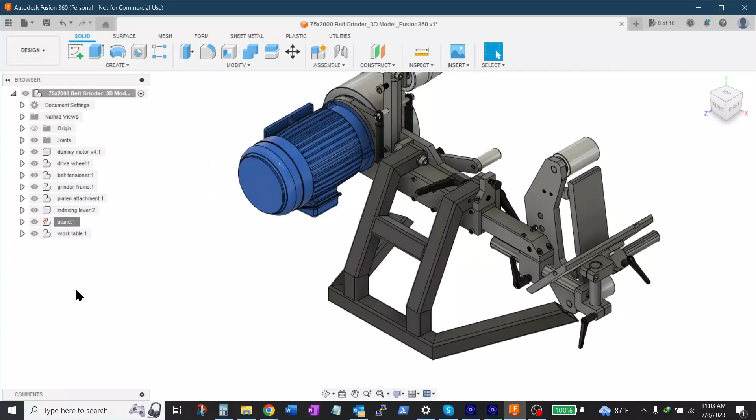This is part 6 of this never-ending saga of building a professional belt grinder by Phil Vandelay's plans. And this week I'm building the stand, shown here in Phil's plans. But I'm going to change it up again. In Phil's plans, it hinges by a pivot right here where the arrow is showing.

And so in the horizontal position, it locks, but it hangs way out there, quite a lot of weight. There's the locking lever and pin. But in the vertical position, there is no lock. It just hangs there by its own weight. You have the tightener clamp, but there's no real way to get a locking lever in there. Because if you put a plate there to lock it there, then in the horizontal position, that's in the way.

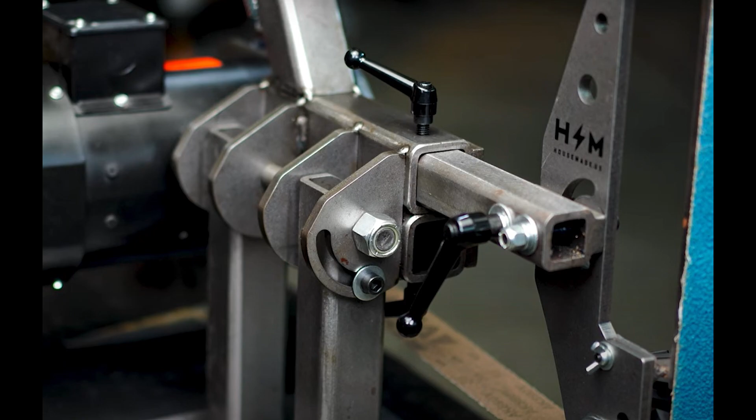So looking around the internet, I found a bunch of other plans, and they tend to use this vertical straight-up post mounted on the back. And I think that's actually better. It's the way I'm going to go. So I started off making those brackets at the back.

So when I was buying the steel, 3/4 and 1/2 inch steel, and the tubing for this project at a local steel supplier, as I was leaving I found this little scrap bin he had, lots of bits in there, and I grabbed a few little offcuts, and then I saw these things and I said, hey, can I have those too? And he said, yeah, sure, no problem, very nice.

Thinking these might be perfect metal to make the brackets out of that are going to be for the stand. I put a fly cutter on this to see how it would go, and it was very tough. I mean, I had to use coolant. Got a nice finish on it, but it's very tough material, so I'm guessing this is probably 4140, possibly even hardened to some degree. But I was able to fly cut it eventually.

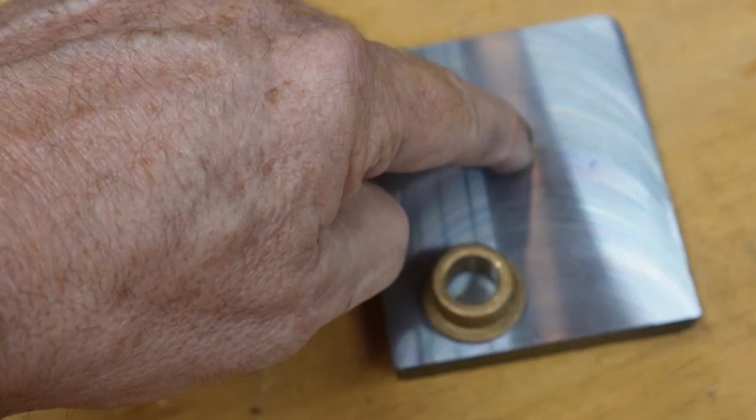So now the holes are a little too big for my 1/2 inch bolts, unfortunately, but I do have some 1/2 inch bushings from another project with a 3/4 OD. So I'm going to see if I can put a 3/4 OD hole there and then base going forward on how difficult or easy that is.

So this is just showing how I use a wiggler to scratch around the outside of the hole to get a nice consistent sound to find the center. I do own one of those coaxial indicators, but I find they just take too long to set up. It's not worth it for a small job like this.

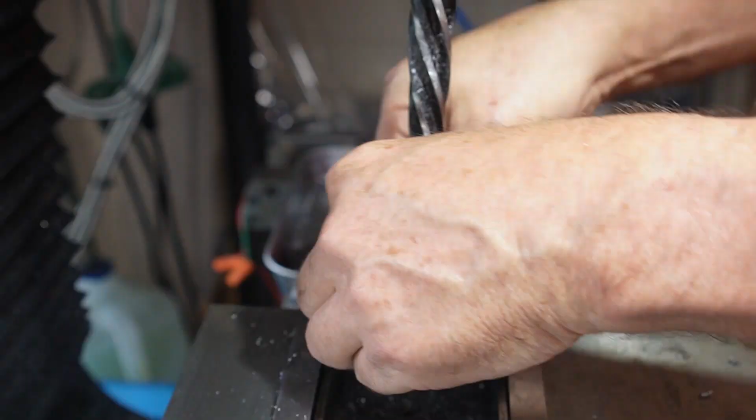So drilling out to 5/8 and reaming out to 3/4, and then I repeat it on the second part. Center finding, drilling, and reaming, and then testing the brass bushing. Fits fine. Okay, so I was able to enlarge those holes to 3/4 without too much difficulty, so my bushings fit in. So I guess I'm going to continue with the plan to use these two scraps. So I'm going to face mill both sides of both of them.

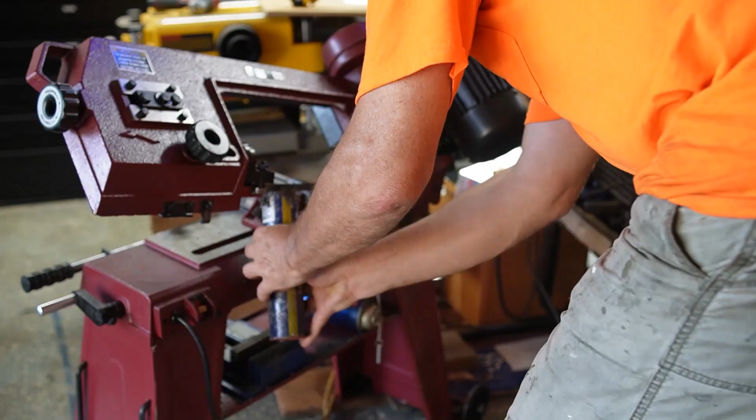So the next several operations, with calming machine sounds, are getting those pivot brackets attached to the rear of the attachment arm sleeve. So I cut them off to just a tad over 1 inch to allow for the stand legs to come, and then milled down their edges.

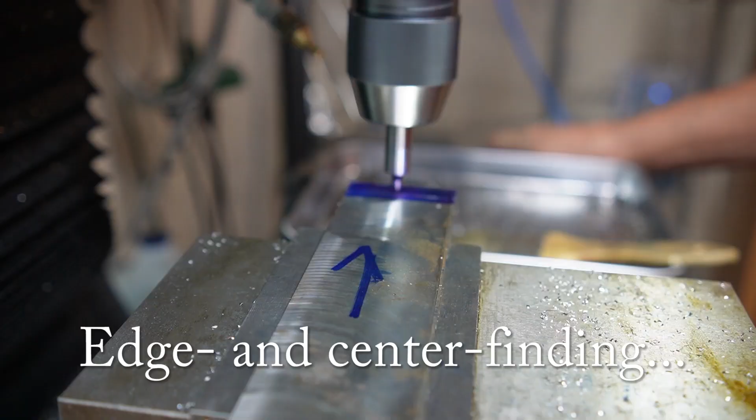So here's that rear attachment sleeve, and I'm finding its center so I can put in some clearance holes for some 5mm screws to come. These are what's going to attach those brackets onto the back of this. And I'm recording these positions in the DRO because I'm going to need them later. Now the cap head screws that are going to be used here have to get recessed into the back here flush to allow for the attachment arm to slide freely inside.

So here's one of the brackets, finding its centers and edges so I can pop those holes into the same positions that are on the back of the attachment sleeve, of course, using the DRO. So I drill them out and then tap them to 5mm for my cap head screws. You're going to attach this part on there. And of course I repeat for the second one, and here they are attached, and everything's good.

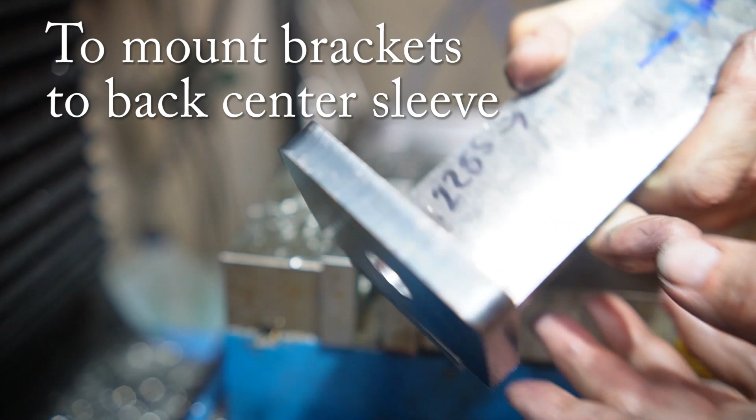Then I temporarily assembled this to test the fit, and I found that the edges of those brackets were just a little too tall. I want them flush, so I put them back into the mill here and just did a real skim to flush them up with the tops of that sleeve, because I'm going to attach some more brackets on here, some strengthening brackets to come.

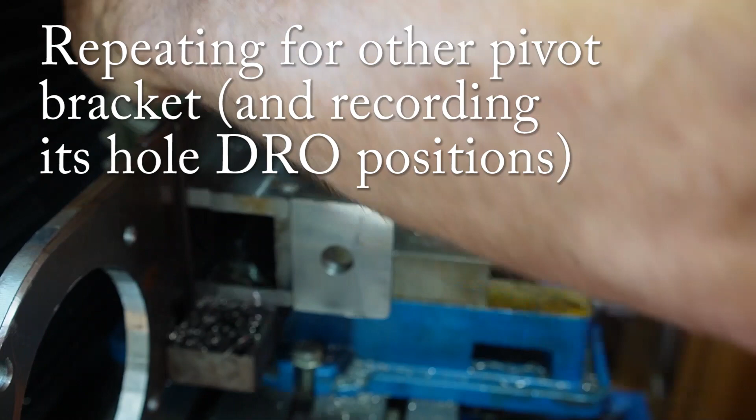So here I am finding the center again, drilling some holes while recording the positions again on a piece of paper for later. Also found the position of those 6mm holes in the sleeve, because they're going to be part of the bracket as well. It's going to be really sturdy with lots of screws in here. So tapping for 5mm in the top of the brackets, finding that 6mm position as well and recording it.

This is just threading the other end bracket. So now I'm going to spend a while doing a purely cosmetic thing here to the main plate. Kind of got a bit of excess steel here that doesn't need to be here. I think it's going to look nice, a little notch cut in here.

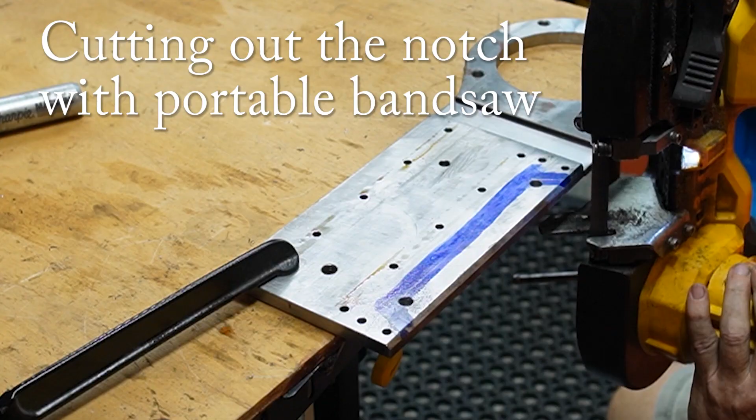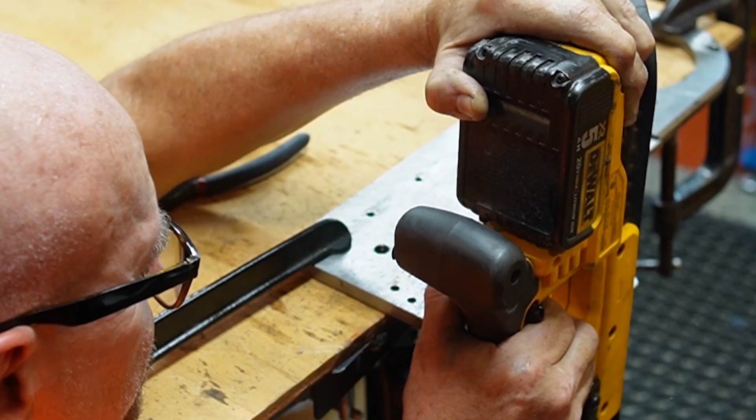So I drilled those holes to give myself some room to get my portable bandsaw in there, and cut out the bulk of the material that way. And then moved it over to the mill so I could clean up the edges, and also chamfer the edges, and tilt it up to get the angles and chamfer them as well. Just getting everything all looking nice and chamfered and consistent. But purely cosmetic, as I said.

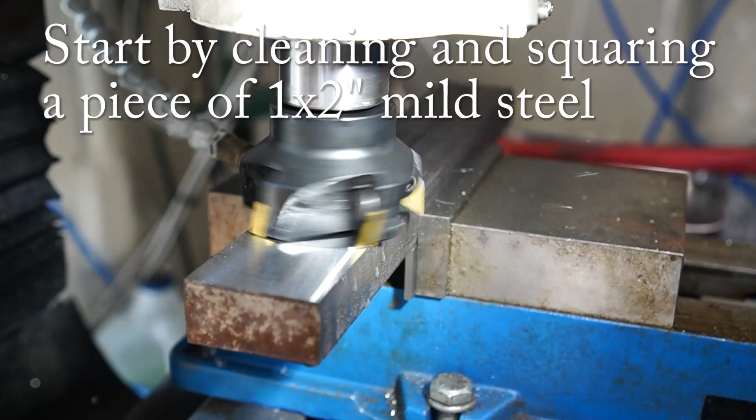So now I'm going to make some beefy support arms for those pivot brackets. You'll see how they're used in a moment. Start by cleaning up the surfaces of this big 1x2 mild steel. So let me describe what's going on with this piece that I just cleaned up. I'm going to use it to brace my pivot point here, my brackets on both sides.

Obviously this is a big, beefy, far more beefy than it needs to be, piece of metal. I do need it a little extra thick because these holes stupidly don't line up. In perfect hindsight, I would have made all this set of holes line up, and they don't. So I need some extra thickness just so I can get holes through it without going out the sides.

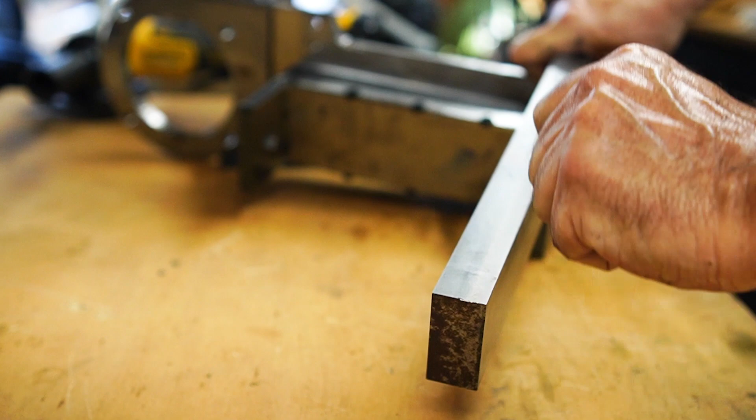And then I want this piece long here to make a handle and a place where I can clamp my part in a horizontal and vertical position. But it's not going to be this thick. I'm going to basically cut this down the center to give myself an inch block on each side, but in a little tricky design here.

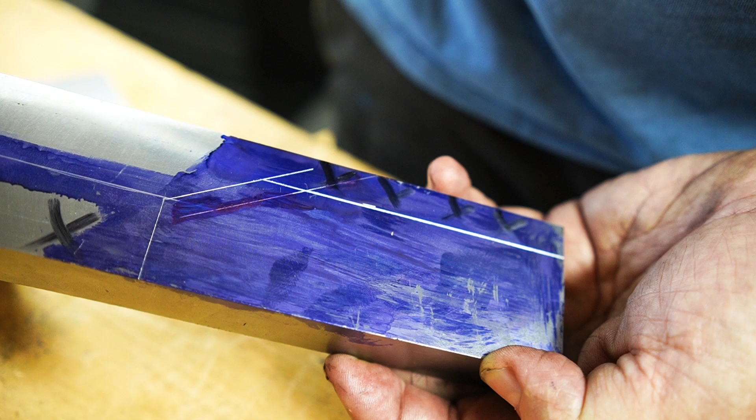I'm going to come down like this on this piece and then go along halfway, and then for the other piece it'll use the end of this to go down halfway. Well, you'll see once I get it marked up. This chunk right here, the angle on there down to here, will be the bracket for the back side, and then flipping it over, this bracket here with a long handle on it, as long as I can get it, will be for the front side. That'll follow this line.

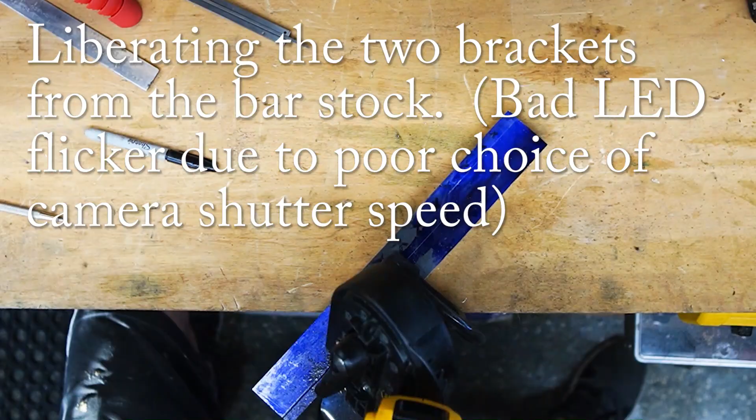Yeah, it just sits there naturally, good and square. I'm going to cut down this line here, and I want to cut on that side of it. This is the good side. I put the extra piece that I cut off in here, same width. Of course, I could have used this thing here as well, but it's just easier to put a piece that's exactly the same width in there. And if I bring the bandsaw down, I am just barely on that side of the line, so that's good. And tighten her up as tight as I can go. And plug it in.

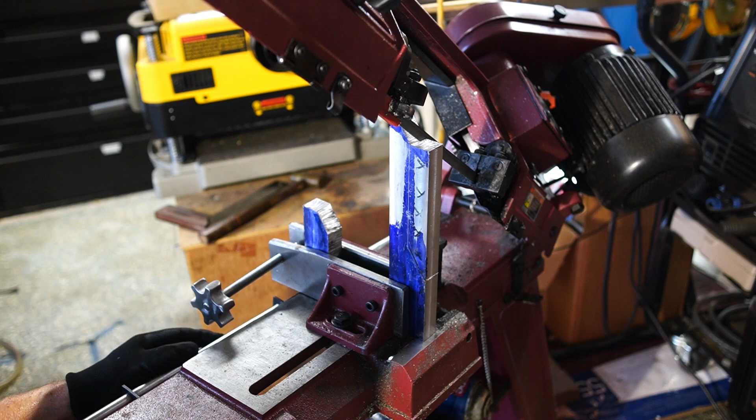After cutting this part down the center, I moved the pieces over to the mill so I could square them up as usual, get everything looking pretty. And there's one piece that has the angle on it for cosmetic purposes, so I used an angle block just to set that 30 degrees there and faced it off as well. Did exactly the same for the second part. Got it looking all pretty, including its 30-degree angle. And I just set them in position to see how they'd look.

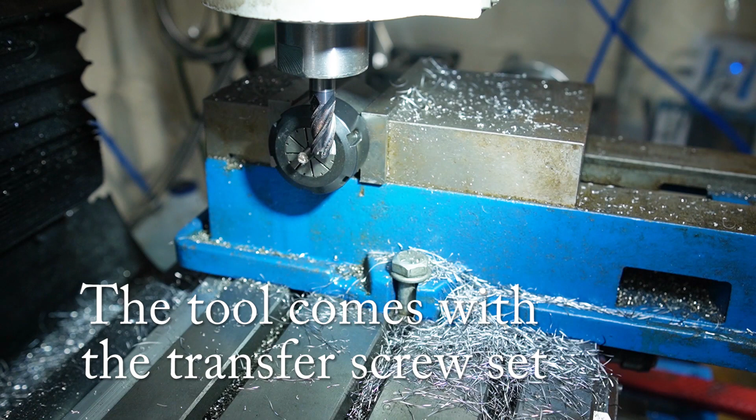So I'm going to use transfer screws to find the bolt patterns for those brackets. I have some M6 and M5 transfer screws, but the M6s are too short because the part is recessed way down inside. So I'm going to make my own. I just cut off a longer M6 bolt here. There's a tool that I can use to put it in and out, so I'm just going to cut 6 flats on it, the same dimensions as this one, so that the tool fits on.

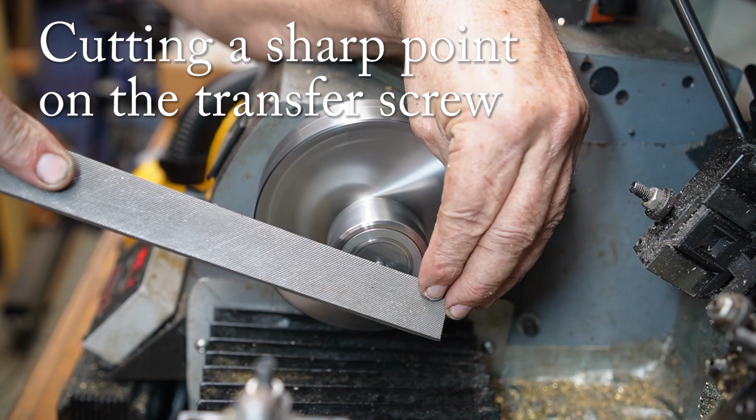I just cut those 6 sides off, turning it around in the collet chuck here. I had a little problem turning it around there for clearance. Got all 6 sides cut off, and then moved it over to the lathe so I could put a little sharp point on it there, first with the bit and then with the files. And yep, it's good and sharp and hard, so it should make a good mark.

Okay, I've got my 3 transfer screws in there now, and you won't be able to see it from here, but I've made sure all 3 of them are level with each other. So hopefully they'll all make an impression when I put my piece down and give it a whack. So you can see my 3 punch marks there.

A little sloppy, but I can figure out where their center lines are, and I've got my DRO positions from when I drilled the holes in the bracket. So as long as I can get the center lines aligned with that, then I can get these guys put into the exact spots where the DRO had it before. And the punch marks are really just sanity checks.

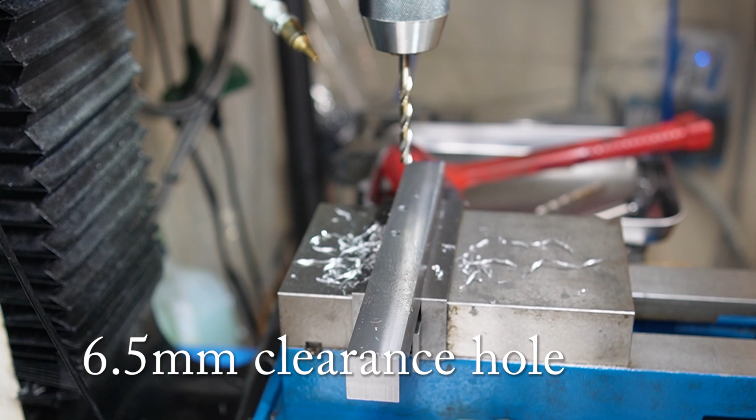So now with the part moved back over to the mill, I find the end and center positions so I can use my DRO that I recorded earlier for those 5.5mm and 6.5mm clearance holes for the 5 and 6mm bolts that go through here to attach it. And then I assembled it just to make sure everything was good, and it is.

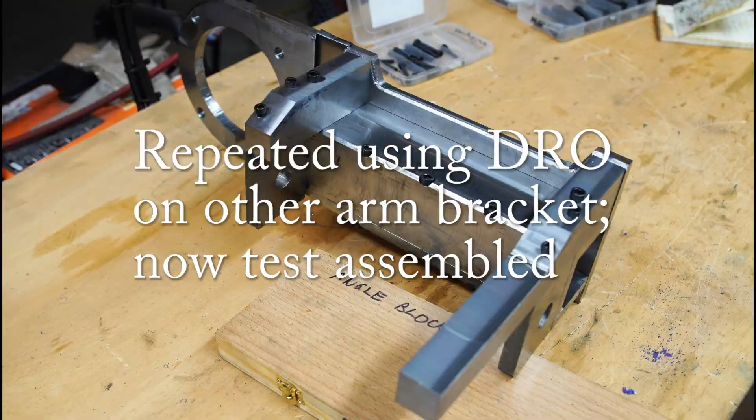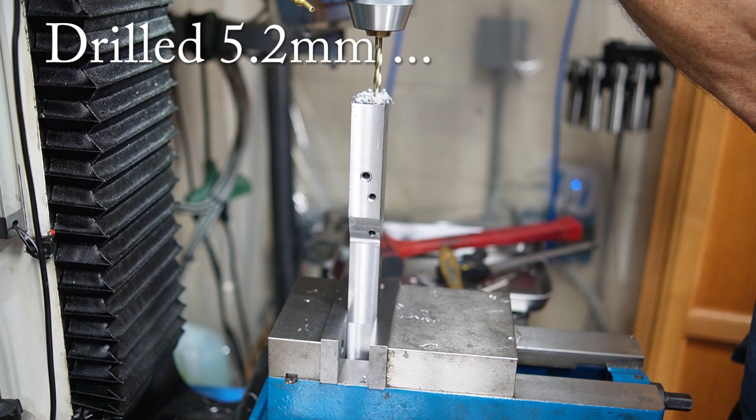Now I'm using a transfer punch here in the end holes to add additional bracing. This is part of Phil's design here. I had these holes in here, so I'm marking them with my transfer punch. Then I can take it apart again and move it back over to the mill so I can drill those holes and tap them in the ends of those arms or brackets. And of course I do that for both parts. These are 6mm threads that go in here. Second part.

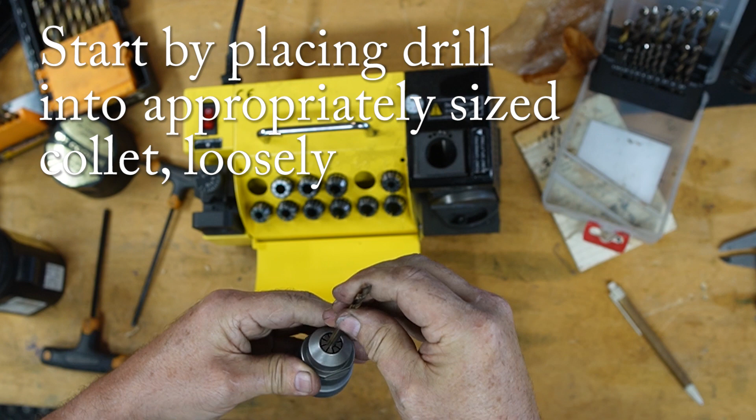This little side project here was to sharpen all my bits. And I'm actually all finished. This is the last one I have to do. Just to show you, I highly recommend this Vevor little sharpener. Quite easy to use. There's a million YouTube videos on how to use this guy, so I'm not going to do it again. But it's quite tricky. Quite clever how this guy works.

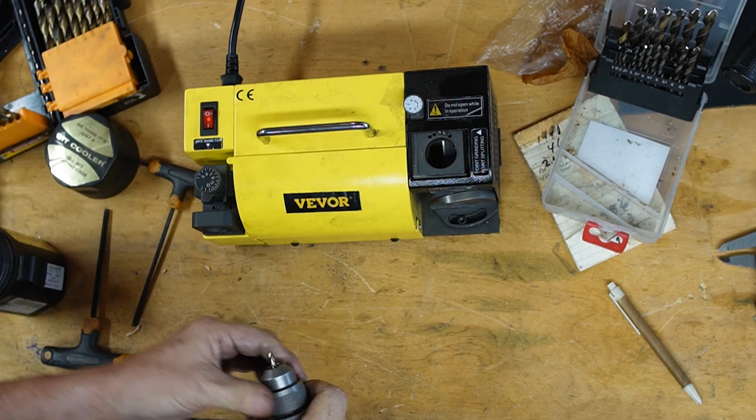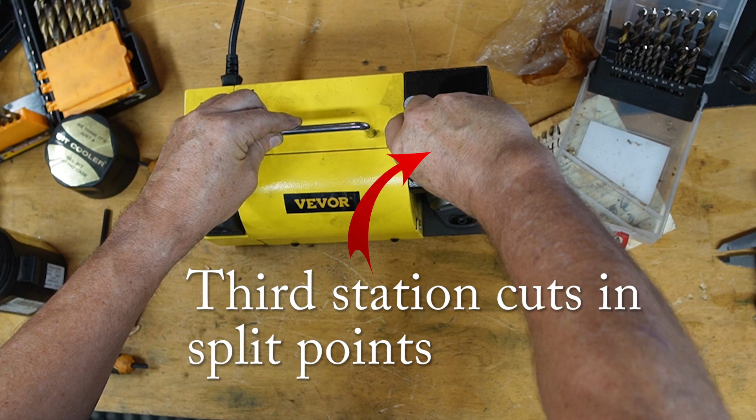Just going to show this last one about how fast it is to grind a bit. This guy's set to 135 for these cobalt drills. There's the sharpening, and there's the split point. And they're all done. I'm sure you can't see that on there, but it's a nice sharp bit. I've used a couple of them already, and they work out really nice.

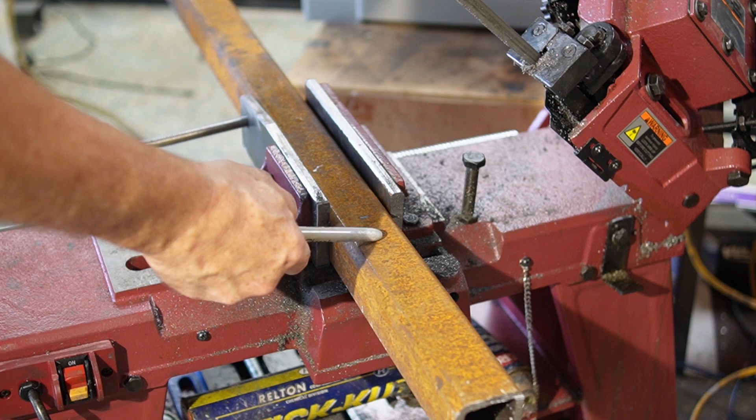So here's the motor assembled to the frame on the bench, using one of these slots in the bench to put the motor shaft down. I just want to see my minimum amount of clearance I need here for the motor in its swing, and I'm going to say 7.5 really is going to do it. So 7.5 inches to the pivot point, 8.5 inches to the end of the tubing, and I'm giving myself just a little bit extra to allow for trimming.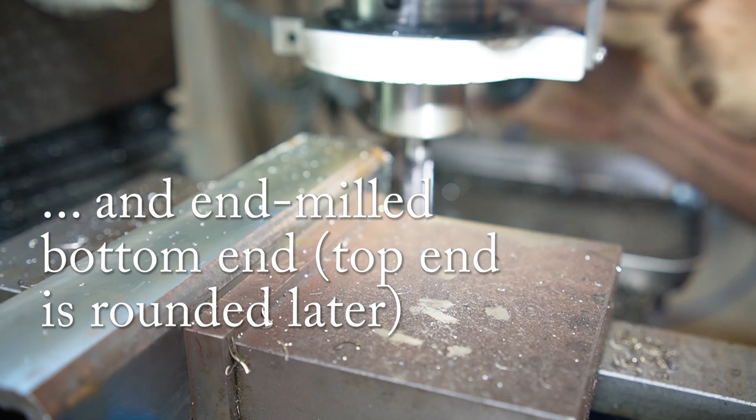So as usual, after cutting off a leg just a little long, I can move it over to the mill, where I can surface all 4 sides to make them look pretty. And I also end mill just one end to square it up. The other end is going to get rounded over. So I do that for the second leg, and we're ready to go.

So I decided I'm going to plug the end of these pipes, these uprights, the same as I did for the tube on the main part, down about 1 7/8 inches. So I've got to round over the edges of this, and I've got to take out the weld bead there. I bought this little small sander on a Harbor Freight special yesterday, so this will make short work of that weld, I hope. And just a flat disc to round over these corners.

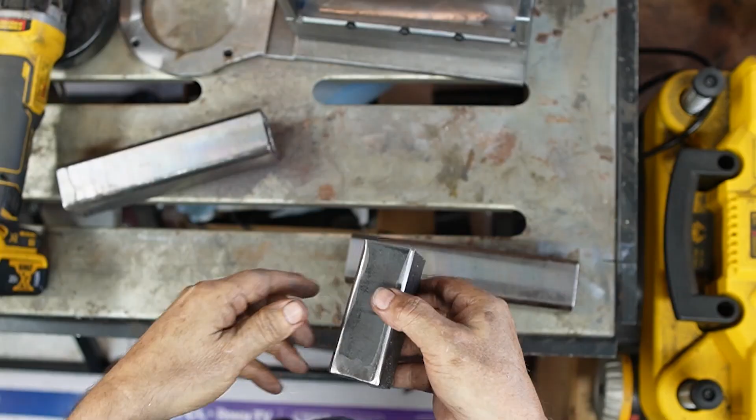So I cut this off to twice length. I'm going to bang it in as far as I can in case I can't get it halfway. Then I'll just cut it off wherever that is and continue on with the second one. Well, I did get it in exactly halfway. Now I'll cut that off there. Then I have to round over as well. Do that in a bit.

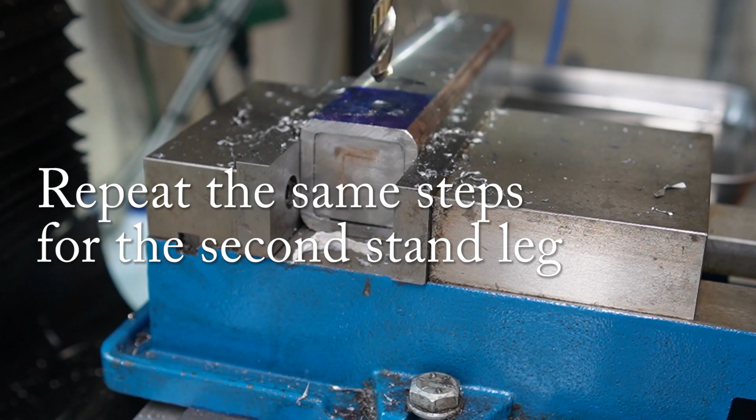And then I measured my bolt in the shoulder and how much I have to countersink this for the shoulder. I have to go down here just a hair over 1 inch to give myself enough shoulder depth for that 1/2 inch bolt that's going to go in there, and then the rest of it's going to be tapped.

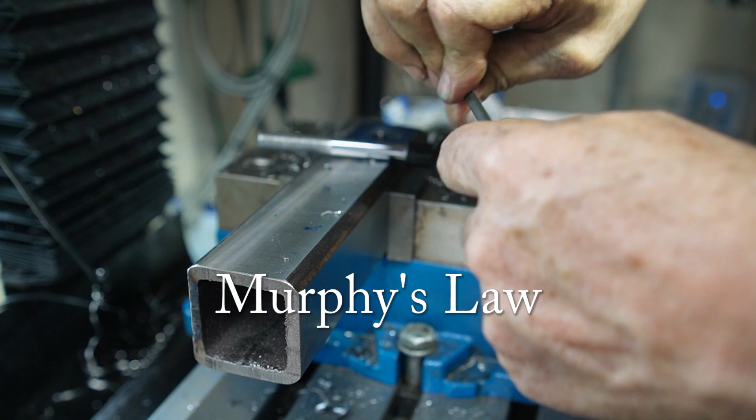Just want to point out the 1/2-13 tap has a center punch, whereas the smaller tap that I was just using, the 6mm, has a center point. And a tap follower is double-ended. It's got an indent for the points and a point for the indents. But it seems that every single time I use this guy, I've got to flip them around. I should buy a second one of these or make a second one. Doesn't take long, but it's just kind of tedious to have to do this all the time.

So flip it around so the point's going down. Spring back in. Allen key back in. And now I've got a point tap follower.

So here it is all assembled on the bench temporarily. Just wanted to see my dimensions were working out, and they are. I have to round these over, of course, so I can actually pivot these by horizontal and vertical. So far it's just in the vertical position.

This bracket here was extended intentionally to put a handle. I'm going to put a brass handle on this to facilitate changing positions. And then here it is in the vertical.

And for a base, I could just weld it on this 1/4 inch plate right here. It would look fine, but it's kind of an expensive proposition. Instead, I'm going to make some tubular steel legs and put them off in little diagonals here for better stability.

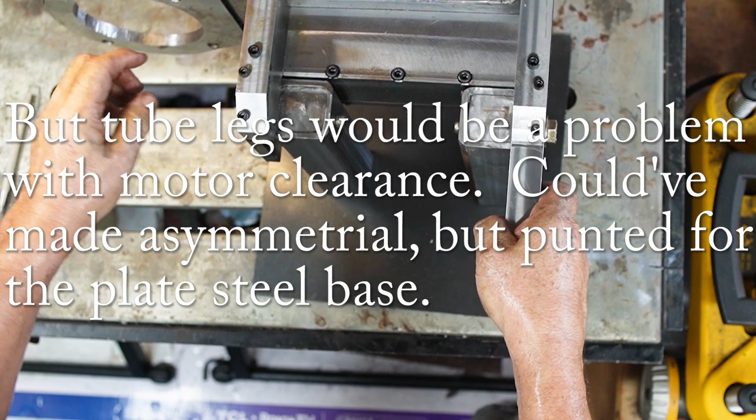But that's it. And then this handle here will help you turn it horizontal, vertical. And it'll also have the pin in here. Well, you'll see. There's going to be a plate welded on here that the pin's going to go through to hold it in the horizontal, vertical position.

That's it. But first of all, I'm going to take it apart, hit these brackets off. These bronze bushings here extend about 1/8 of an inch, and I have 1/8 of an inch of extra distance here available. So I'm going to recess those guys in. I'm going to mill out little divots for those bronze bushings. I think it'll look nicer. It'll space these legs just that little bit, 1/4 inch further apart.

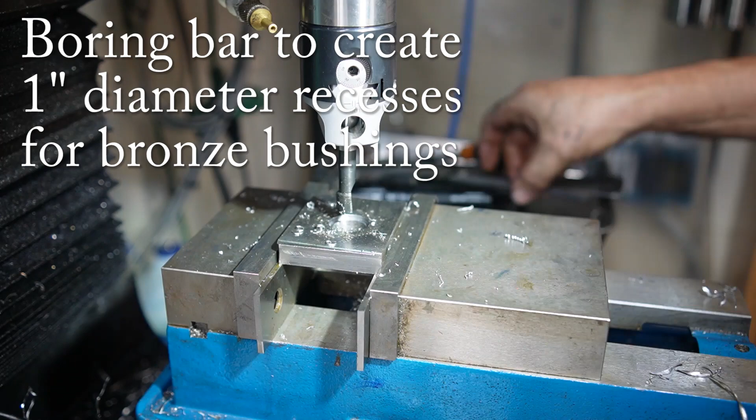I'm just going to do something purely cosmetic here with the brackets. I blued this up and just scribed on here. I'm going to make a slot in each of the brackets just to look pretty. I happen to have a 5/8 drill, so I'm going to make it 5/8 wide.

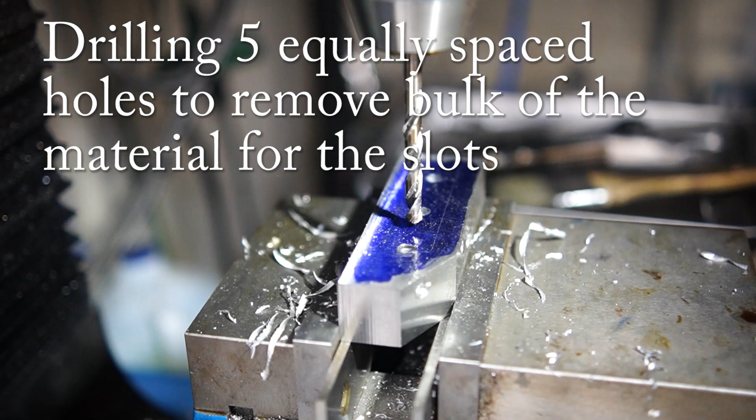So edge find. I've got this lined up with the edge of the vise here so I can get the second one the same without moving too much stuff around. So I'll find the center of this first, so I can cut the slot in the center. So now I brought in my 5/8 bit here. Let's see how it performs.

This mill is just barely deep enough to reach through to the bottom. Gotta use it all.

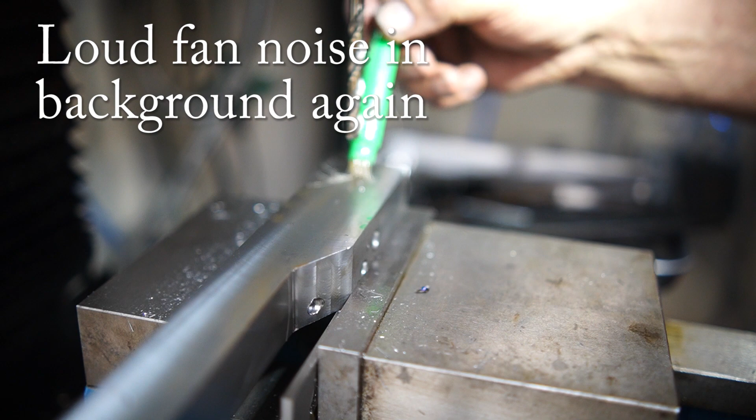Okay, so I'm just going to repeat the same steps to cut the slot in this other bracket. I have it even with the end of the jaw here as the last one is. I don't have to do anything else. I got my Y already set. Got my X set at 1 inch there for the first hole.

I think I can chamfer this whole circumference in one pass here.

Okay, I have this mounted in here flush. I need to counterbore each of these. These are for 5 millimeters, this is for 6 millimeters.

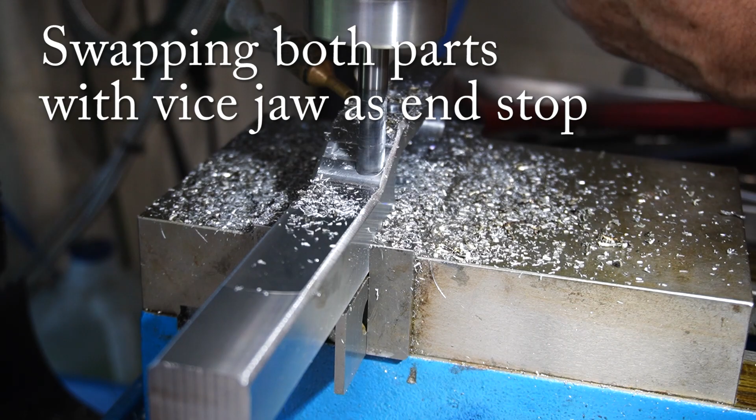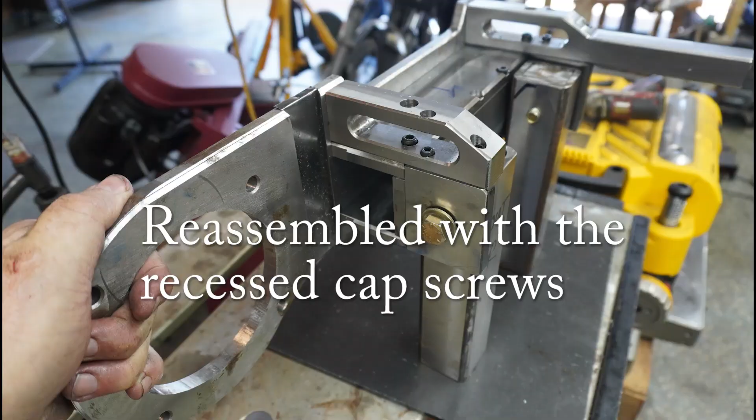Okay, I need to round over these leg ends with a 2-inch diameter, 1-inch radius. I actually used a platen wheel, which is exactly 2 inches, in the hole there. It's also 1/2 inch, to scribe a mark. Then I use my bandsaw to cut down the corners, and I grind it round a little bit to save myself some time on the mill.

So now I can rotate this around and do the perimeter there, the circumference. Got that centered on the hole so that my curve will be centered. And that's just a matter of eating down. I'm going to have to do this in 4 parts. I'll do this top part, then I'll flip it over, do that part, and then I'll have to put the parts together the other way and do the centers.

Okay, I couldn't put the 2 pieces together in the opposite direction because the threads are only on one side, so instead I've got a long bolt down through the bottom of the vise here, and that gives me a pretty solid pivot here. I've got this centered on the bolt again, so I can get this over here and get it centered and start cutting away again.

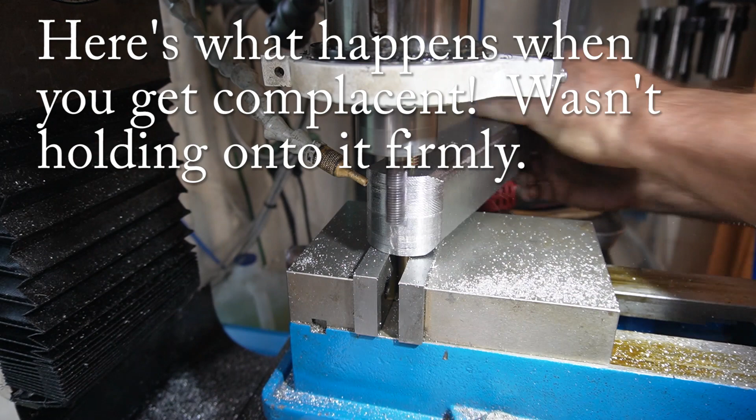Just my repair to that gash I did earlier. Just filled it with some weld metal. I'm going to face it off again. Never happened.

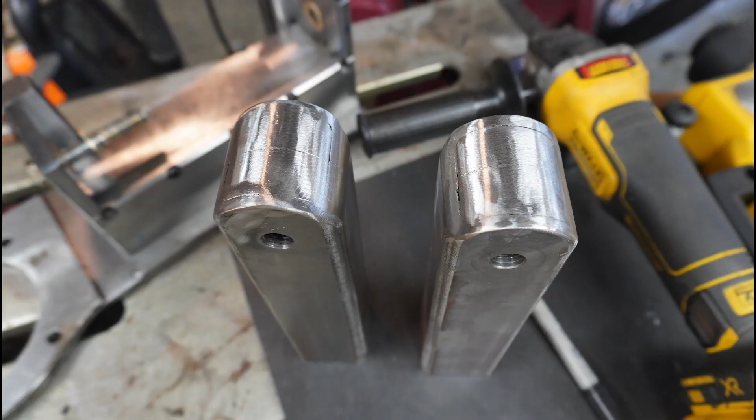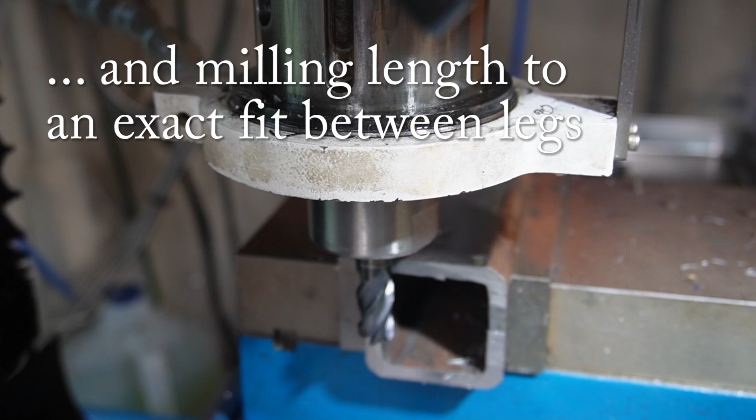So now I'm going to weld in a cross brace in between the 2 stand legs for strengthening. So here I'm just going to cut it off on the bandsaw to begin with, a little long. And as usual, facing all 4 sides, then cleaning up the ends to an exact length that'll just fit between those legs. And then welding it into position.

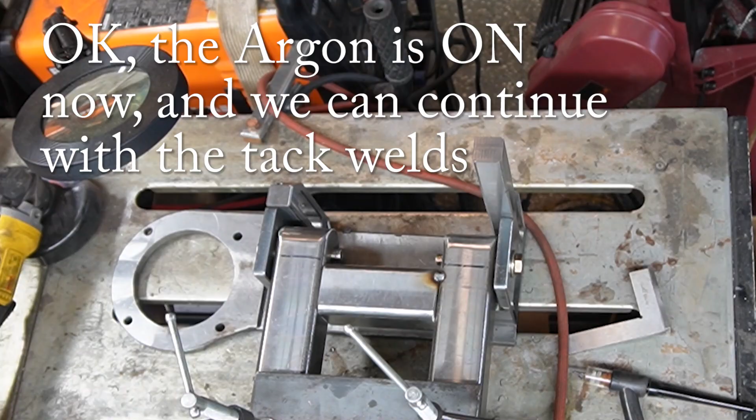Now here I am tacking it up. I forgot to turn my argon on, so I got those fireworks. Very nice. Went over and turned on the argon and came back and finished up my tack welding. Fixed that first one, and then the other side. Here I am making a cardboard template that'll eventually become the positioner plate made out of steel. It's going to go here to hold the locking pin in place.

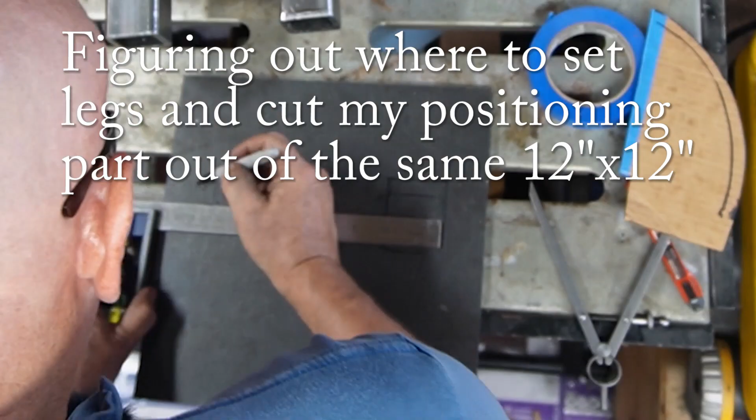And I spent a little while figuring out how I can get that piece of steel cut out of the same base plate that is going to form the stand base. So here I'm just adjusting the position of the legs a little further higher to fit that piece of cardboard in there. No, wouldn't fit, so I trimmed it a bit, and now it'll work.

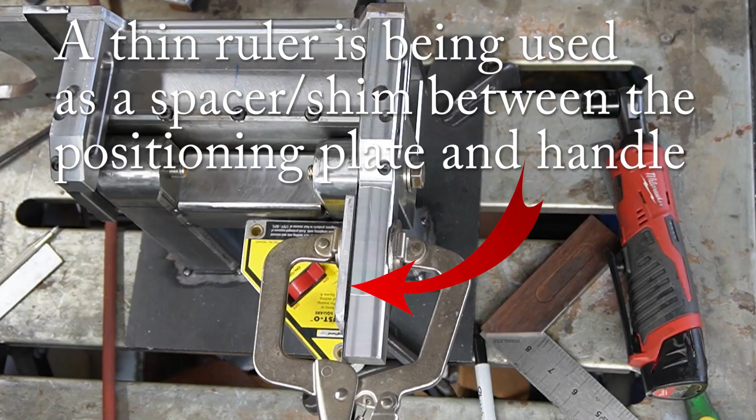So now that I've got it laid out on this piece of steel, next I clamped the whole assembly down on top of those square Sharpie marks to make sure everything's going to work fine, and it did. And I cut out my positioning plate, and then I tacked it into place with a little spacer in there between the handle,

and then moved it down to the other position, the horizontal position, and tacked in the bottom, again with the spacer in place. As I point out here, that spacer turned out to not be quite wide enough. I ended up trimming down the handle just a little bit to clear for the thickness of the paint later on.

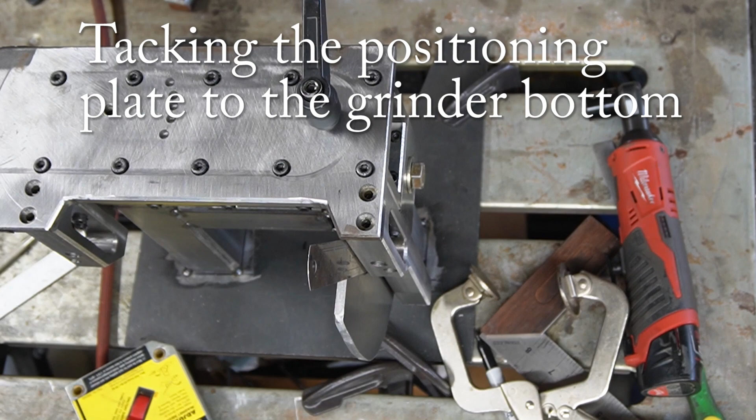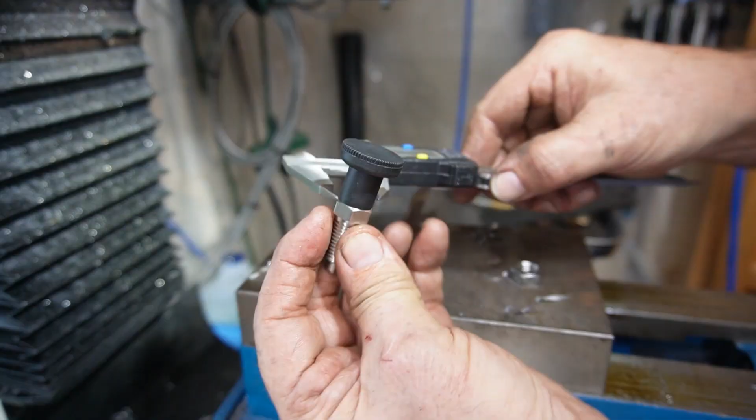It moves well. Now with the handle removed here, I'm preparing it for the positioning plunger. So of course drilling it out to the proper size, figuring its depth there, putting an indent for the shaft of it, and to accommodate the nut so I can get it deep enough, and then tapping it. And it fits well, and it's got enough depth in the bottom.

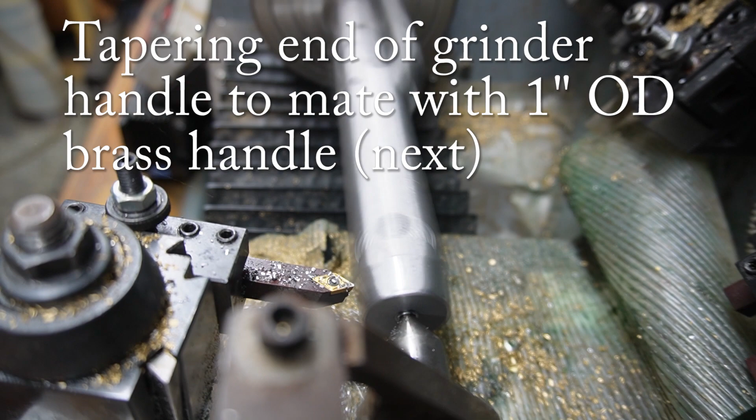So now I've put the handle into a 4-jaw chuck here and got it spinning fairly true so that I can put a taper on the end of it here so the square will form a cylinder of 1-inch diameter that's going to mate up with a brass handle I'm going to make here in a moment. And then drilling and tapping the end of the handle here for an 8mm threaded rod that's going to hold the handle in place.

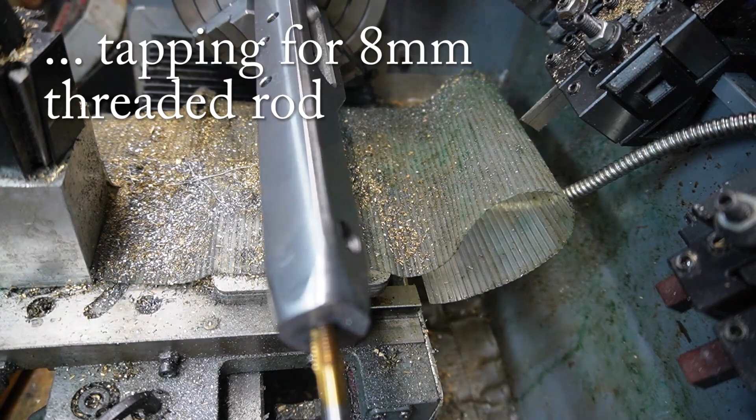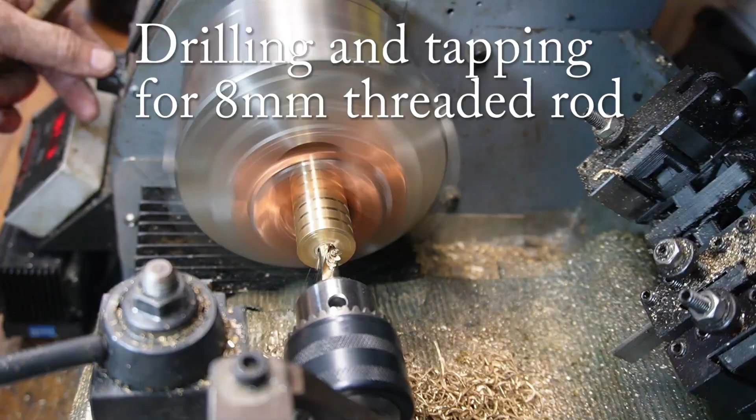And then here's making the handle itself out of a 1-inch piece of brass. You've seen me do this several times, a very simple procedure. Just getting it cleaned up. And then I put these nice little decorative marks 1/4 inch apart that I did for the tensioning lever as well, so they match. And then cut it off. And use some soft jaws to hold it while I drill and tap it for the 8mm. It's going to hold it to the handle. And there it is, not too bad.

So on the home stretch of this part 6, I just need to weld up the rest of the stand to the base. Whenever I'm starting a welding project, I like to sharpen up a whole box of tungstens here, so I know I'm going to go through some of them. I'm not the most expert welder. So I've got this double-decker polisher grinder situation here just to save some space.

Turn on my grinder. It's going to be loud, of course, when I turn this on. I've got a mask for my tungsten dust. I think I'm going to turn the fan on behind me as well, so it's going to get very loud because it's about 90 degrees in the garage here right now. Be right back. Okay, fan's on, grinder's on.

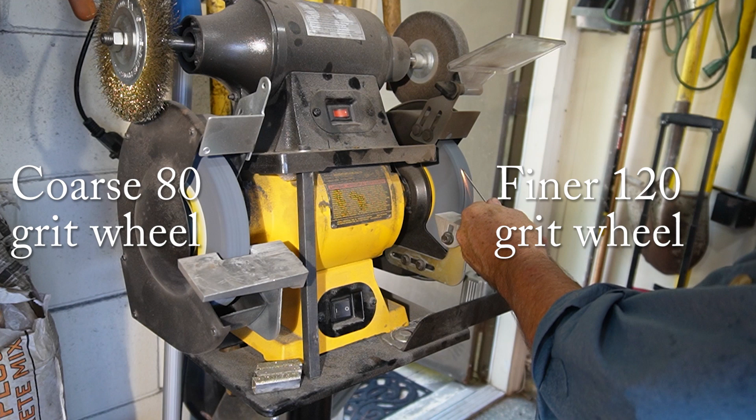First thing I like to do is just start with a little light dressing. These guys are already pretty good. Coarse wheel and the fine wheel. And then I just like to put my tungsten into an electric drill and sharpen them out like so. Start on this grinder to get a nice point just like that. That was a pretty clean one already.

Here's one in a little worse shape. I'll start on the coarse wheel. I just eyeball the angle. As long as I get them consistent so the welds are all the same. And there's 2.

So there we go, the whole box sharpened in about 5 minutes. And 1 finger burn. I took one of the short ones out when it was still hot. Gave myself a pretty nice burn. But I'll survive. And I also separated the longer ones and the short ones. Stubby ones.

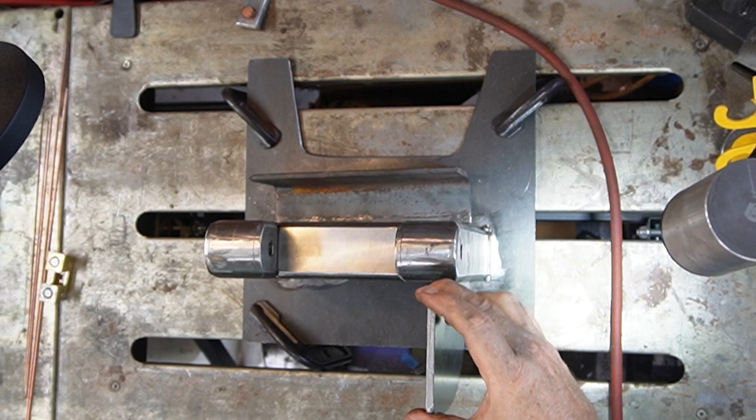Okay, time to finish up these welds around the base and the bracket here. I'm a spectacularly mediocre welder, so you're not going to learn anything here. The only thing I know is I need to wear long sleeves, because you get a sunburn pretty darn quickly. Obviously a proper helmet and gloves. I want to avoid warping, so I'm going to do it in sections, a little bit here, a little bit there. I'm going to keep it clamped down as much as practical, again to try to avoid warping. And that's about it. I'm just going to go around and do my thing.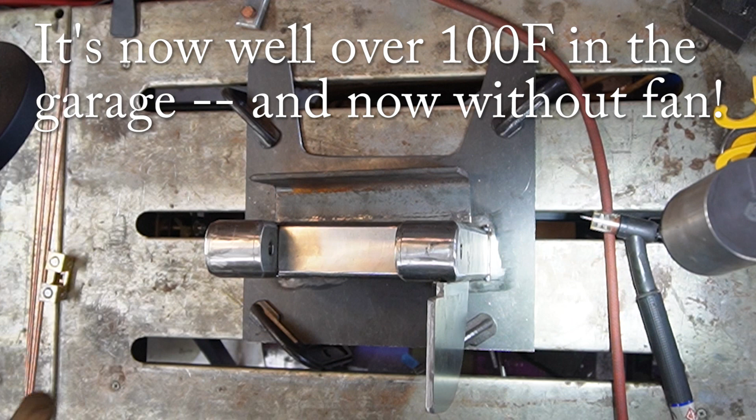It's going to be hot as hell in here because I can't run the fan while I'm welding, because the fan would blow away the argon, and that's how you get burns pretty darn quickly, as you saw in a little demo yesterday. So I got the TIG set at 125, 1/4 inch base metal here, 1/4 inch wall thickness here. Should be about right. Get suited up here and lay down my first little pass. And then I'll probably cut to the end because, again, you're not going to learn anything from my mediocre welding.

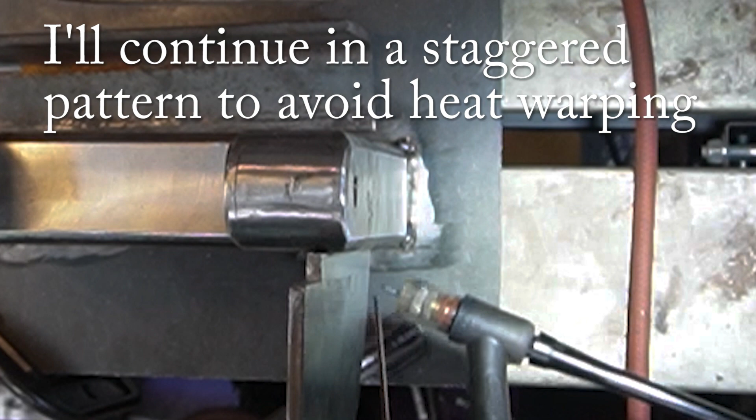Got a beautiful stack of dimes, or maybe not dimes but something else, but they're a stack of something. Anyway, that's my welding, and I'm just going to continue around the whole perimeter of both the legs here. Maybe bring you back for as I weld up the little bracket here.

So I've cleaned things up pretty well. Welds look pretty good. Don't have to be a good welder, you just have to be a good grinder, they say.

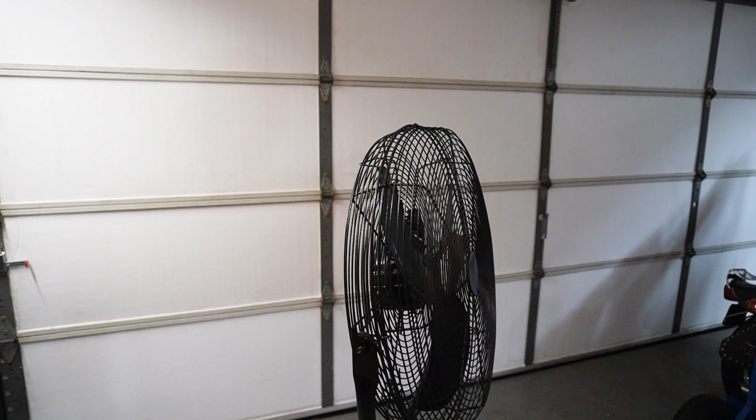So here was a pretty big side project during this build and why it took so long. It's been 90 degrees and up in Florida for the last 2, 3, 4 weeks now with no end in sight, just really, really hot. And this garage, when it's 90 degrees outside, is 120 degrees inside.

So I finally got around to insulating my garage door, put a strip down on the bottom as well. Got everything all tuned up. The sealer there. Also sealed the outsides. So everything all is pretty leak proof.

And then the big deal is I installed a mini split AC. And now that I've done it, I wish I'd done it years and years ago when I bought the place. It's just been so nice in here now. I've got it set at 75 and it keeps 75. Big job, of course, to set it up, but there's the outdoor unit all plumbed in, all looking neat. And so now I can actually have some nice comfort in my garage, which is so much nicer.

So I'm finally able to do a workout here at my own time, at my own pace, without having to worry about the heat, and especially about not worrying about the mosquitoes as well.

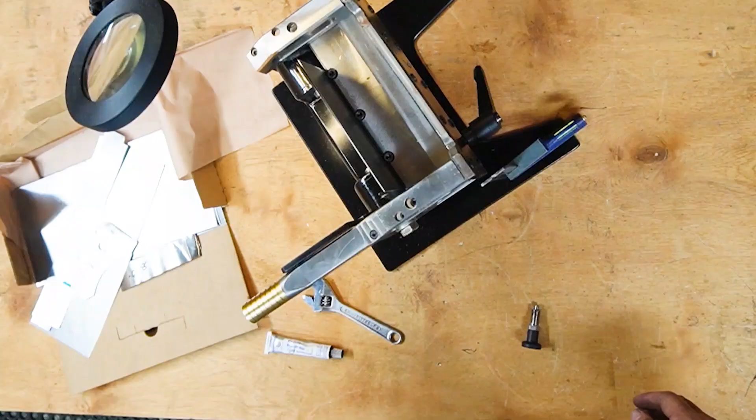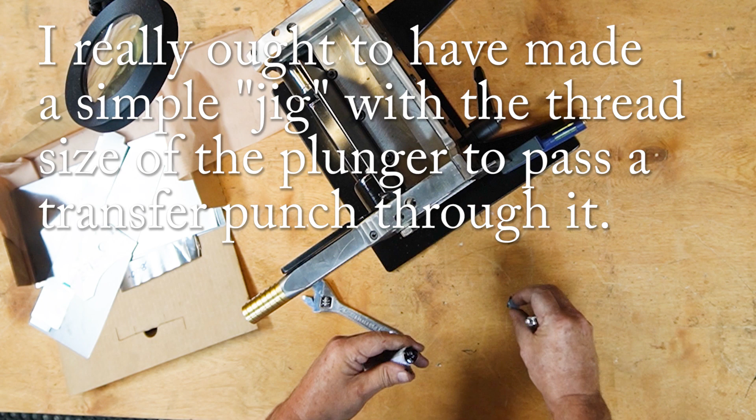So as you can see, I've got it reassembled here, and just with 3 shims here in between the main plate and the base, I find that makes it perfectly square to the base, which is where I want it. And so now I'm going to put some Prussian blue on my spring plunger here and make a mark for drilling in the flange here. Looks like that's doing it right there.

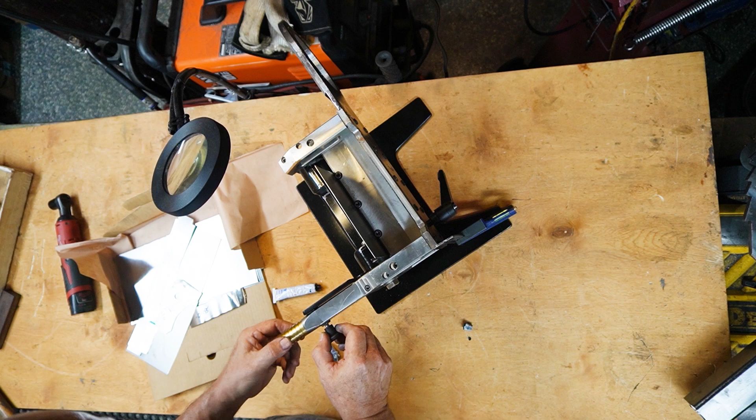Now I can take it off again. Let's see what I've got here. I gotta take my shim out first. Oh yeah, that's perfect. I can see the center of that just fine. Then off camera I hand drilled that hole, reamed it out, and repeated it for the horizontal position.

So this arm is just barely rubbing on the flange on the base. It's just the thickness of the paint, really. I'm just going to skim off just the tiniest bit off the surface of this and make it look pretty at the same time with this fly cutter.

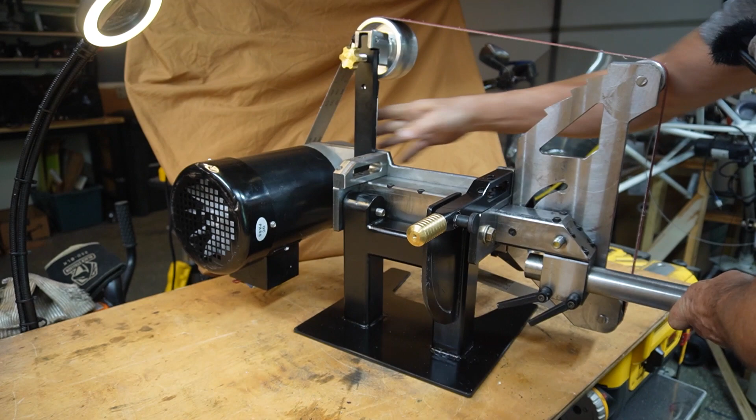So here it is all put together again on the bench. The base is obviously the new addition here. Everything else was made in previous videos. So to show you the base in action, there it is in the vertical position. Drops into the horizontal just like that, and it's very solid, and back to the vertical.

Works great. And I've got just enough clearance here for the motor. Just barely clears there by about 1/8 of an inch, honestly. It's very close, but it fits perfectly, and that's all you need. And it's very sturdy this way. When I finally have it on the real bench, I'll probably drill 4 holes in here and bolt it down.

But it's very sturdy the way it is, and it's very nicely balanced. I kind of like the way it balances. It's easy to push in either position. So hey, it's a wrap.

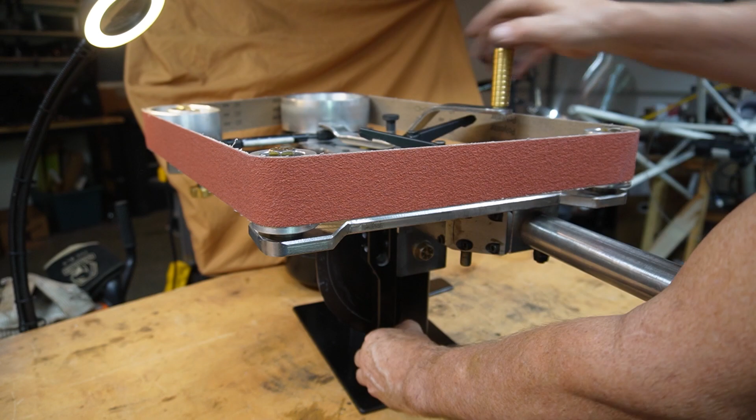So now I have the bulk of the grinder built, except for the platen and table parts. It currently ends with this 1.5 inch rod. If you look at what Phil calls his front view, I think it is the back, but he calls it the front, there's this L-shaped bracket that firmly attaches to the end of that 1.5 inch rod. It's got a split clamp onto this 1 inch rod so the table can be adjusted vertically.

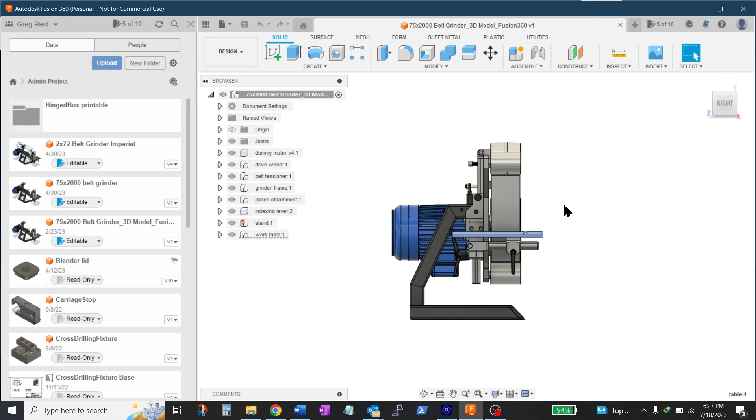And the top of that 1 inch rod is held by this bracket, which in turn holds another 1 inch rod horizontally. And then the split clamp allows the table to be adjusted horizontally and ultimately holds the table in place. So all of that is what I hope to get accomplished in the next part 7 of this series. And time permitting, I'll also make this simple platen and the brackets that hold the platen. There's lots of parts, and we'll see how far we get.